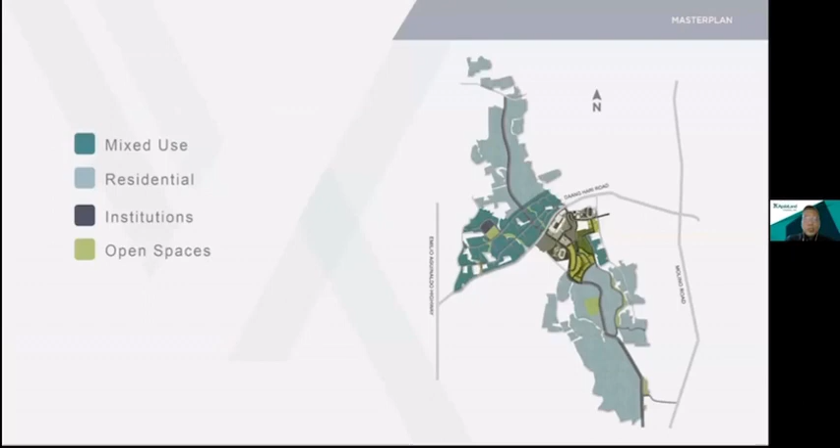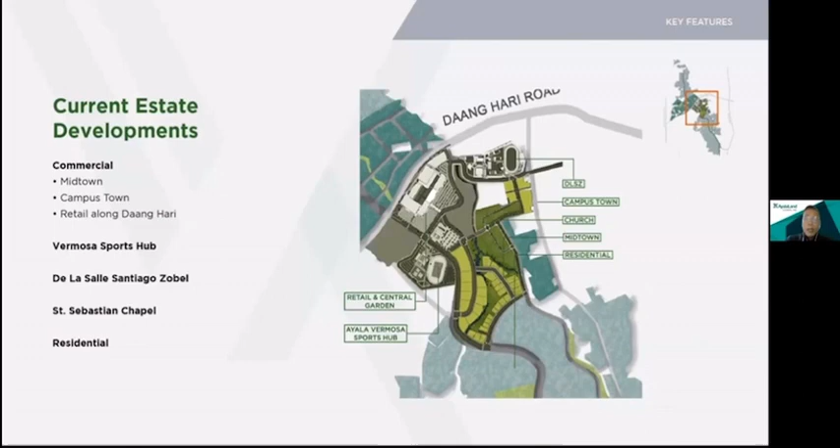Here's the master plan of Vermosa, which encourages walking and biking in the estate. The master plan ensures that each residential subdivision within the project will have access to the commercial business district or a neighborhood commercial center within a 10-minute walk or bike ride. To enable this, Vermosa has dedicated pedestrian and bike lanes.

It also features a 14-kilometer greenway that interconnects the parks and open spaces in the project, stretching from north to south of the entire estate development. This will allow free flow of traffic from residential communities to the urban core, reducing reliance on vehicles to move around.

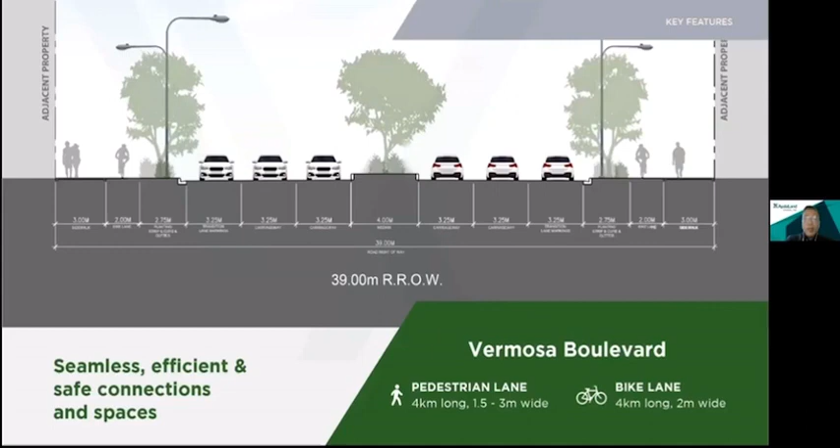Now, in order to master plan a future city, we had to look at trends to see where the market is going. There were two emerging global trends we identified that we believe will have an impact on how people live. Largely because of the media and advancement in information technology, there's a growing awareness for health issues, resulting in people becoming more conscious about their health. Second, people are spending more time and money to engage in physical activities, specifically sports.

This growth is very evident. We've seen this in the number of runners and bikers that troop to our Nuvali estate, and even our Ayala Triangle Gardens in Makati City. It is very active with runners at night.

Given these insights, Vermosa was master planned to create an environment that encourages healthy living and engaging in physical activities. By creating an environment that promotes healthy and active living, we believe that we are creating more value for our stakeholders.

Vermosa is situated along Daang Hari Road within Cavite's main centers of growth, Dasmariñas and Imus City of Cavite. The estate is easily accessible via major road networks through MCX, SLEX, and then the Susana Heights Skyway Extension.

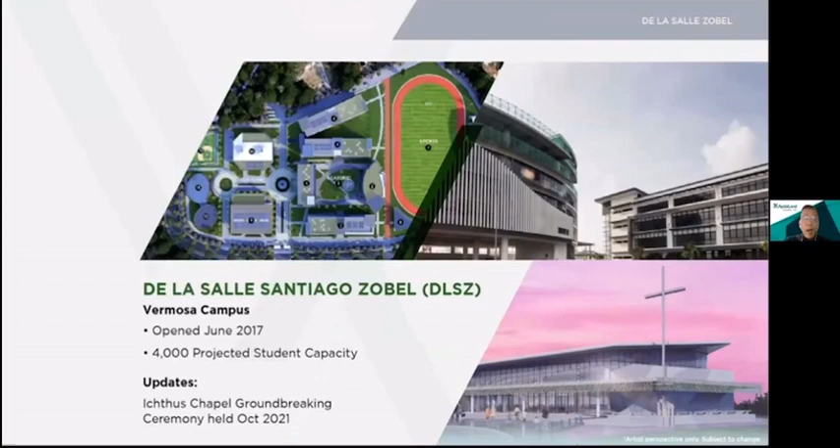Projected to have 4,000 students, this campus will cater to K-12 students. They also had their groundbreaking ceremony of their Ichthus Chapel last October 2021.

For the malls of Vermosa, or the Vermosa Mall, with a total gross leasable area of about 36,000 square meters at full build, the Ayala Malls Vermosa will be a premier destination in this side of Imus.

Jollibee opened up last December, while Peri Peri and Shakey's are targeting to open by first quarter of this year, followed by Coffee Bean and Tea Leaf by the second quarter, and the first of the 5 buildings of this mall is set to open by October of this year.

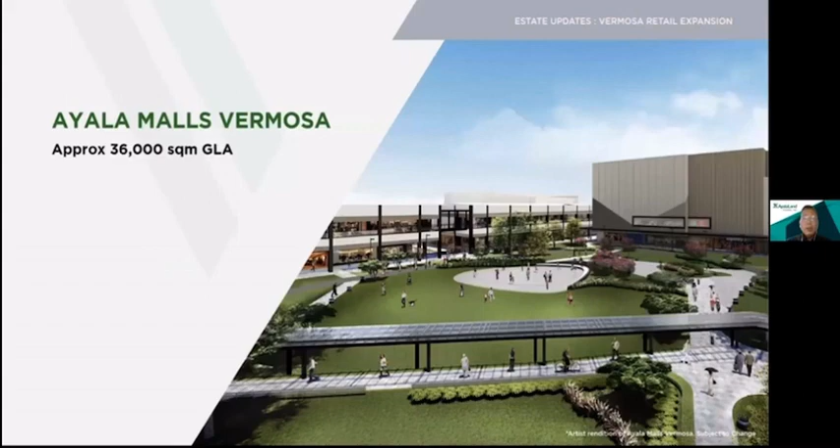Now the retail expansion caters to the growing on-the-go communities. Currently operational are Starbucks, McDonald's, and Petron, while Burger King and the Central Garden of the malls are set to commence construction by this year. Soon to rise in Vermosa as well is the fastest growing membership shopping store in the country, Landers.

With the market potential, Vermosa will launch this quarter an outdoor weekend market that will offer affordable food options, home, and sporting accessories. To provide transport connectivity to and from Vermosa, a transport terminal is set to operate by next year, 2023.

Named after the patron saint of athletes, the St. Sebastian Church will be erected in the heart of Vermosa. A 250-seating capacity structure will cater to Vermosa and its surrounding communities.

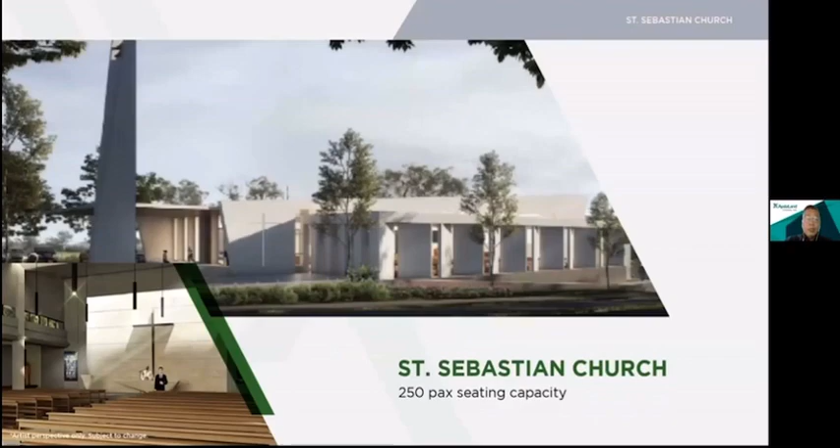Let me now introduce to you Vermosa Campus Town. This is the newest inventory for commercial properties, envisioned to be a vibrant center for youth culture in the estate. It is a sub-district of Vermosa Midtown, cultivating the interest of the younger market, a commercial and residential district that offers choices for affordable dining, retail, and shop houses for residential living.

The total area for the Campus Town project is about 11.2 hectares, with lot cuts ranging from 1,300 square meters to as high as 3,485 square meters. It's envisioned to be a contemporary urban district, resembling harmonized modern American blocks.

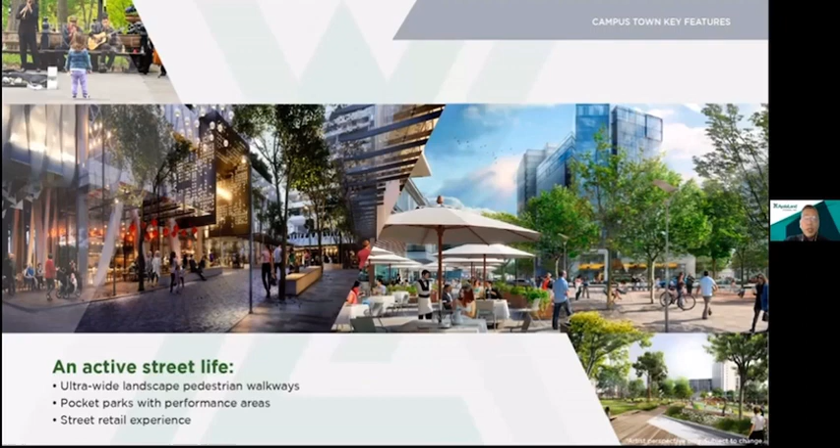It would feature an active street life, and this development will have a street life experience bolstered by ultra-wide landscape pedestrian walkways, pocket parks with performance areas, and a street retail experience.

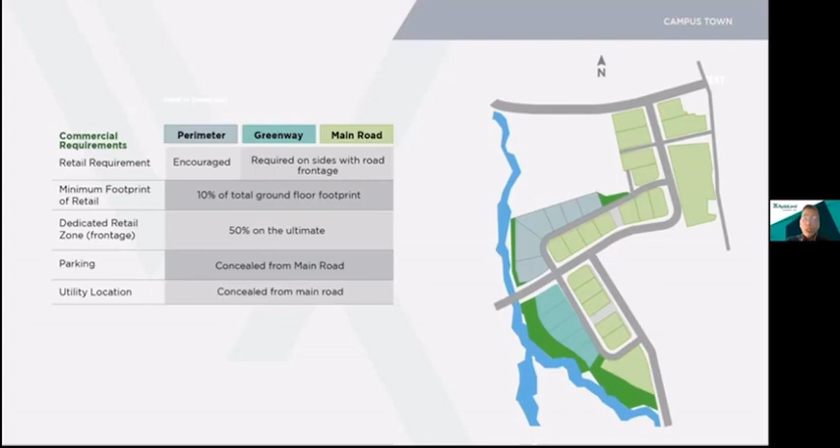In terms of general design guidelines, retail is required on greenway and main road lots with road frontage. Perimeter lots are encouraged to have retail. Minimum retail footprint must be at least 10% of the total ground floor footprint. Parking and utility locations must all be concealed from the main thoroughfare.

The following slides will show the different design intent within this development. There'll be medium-rise residential buildings and mixed-use development. Urban lifestyle is engaged by merging residential and mixed-use development with parks and dining up front to attract more people, and the MRBs, or the medium residential buildings, shall cater to student housing and public lifestyle center.

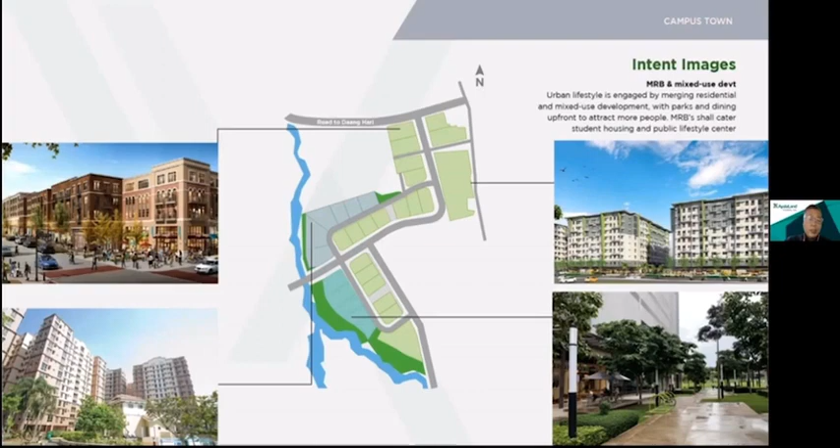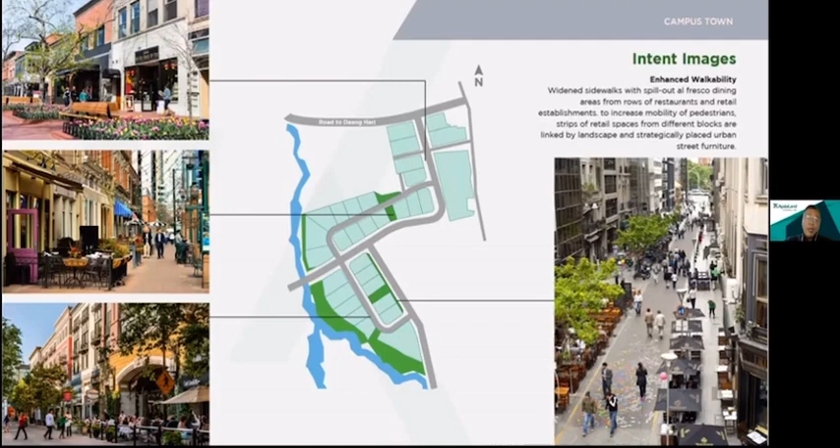It will also have an enhanced walkability, widened sidewalks with spill-out al fresco dining areas from rows of restaurants and retail establishments to increase the mobility of pedestrians. Strips of retail spaces from different blocks are linked by landscape and strategically placed urban street furniture.

Open leisure spaces are a variety of areas where students and the public can mingle and enjoy, promoting holistic interaction, not only as consumers, but as part of the community. Such landscape areas engage outdoor activities including picnicking, playing, or simply studying.

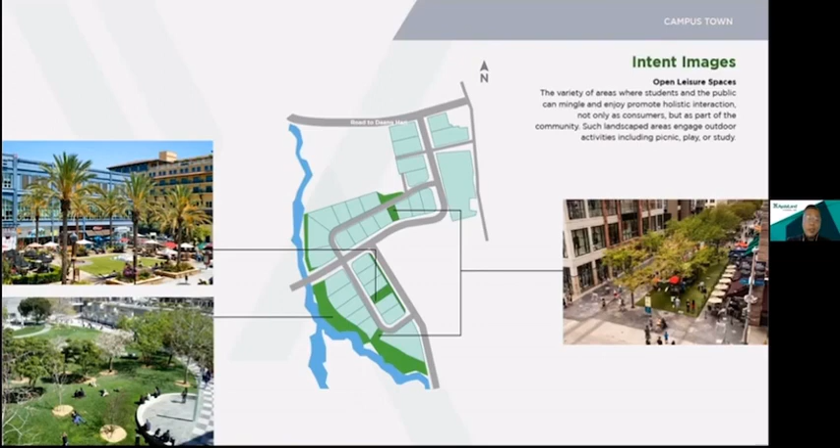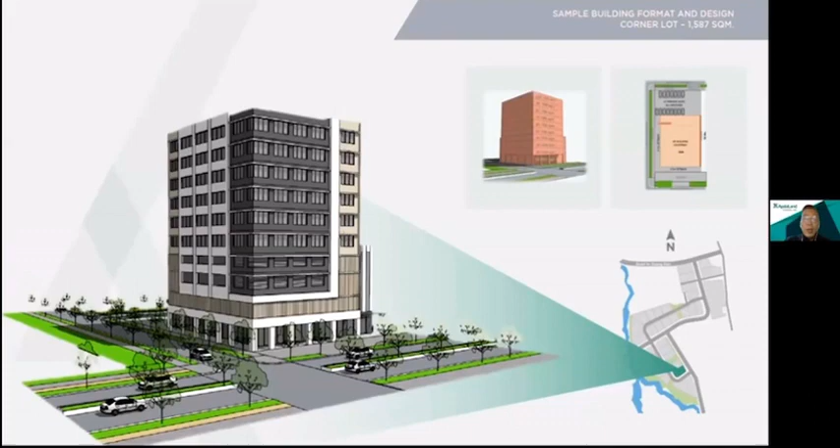And these are the slides showing how we envision the Vermosa Campus Town. For everyone's information, Amaia Medium Residential Building is set to launch by this year, while Avida Medium Residential Building will be by 2023. The entire Vermosa Campus Town is just fronting De La Salle Santiago Zobel.

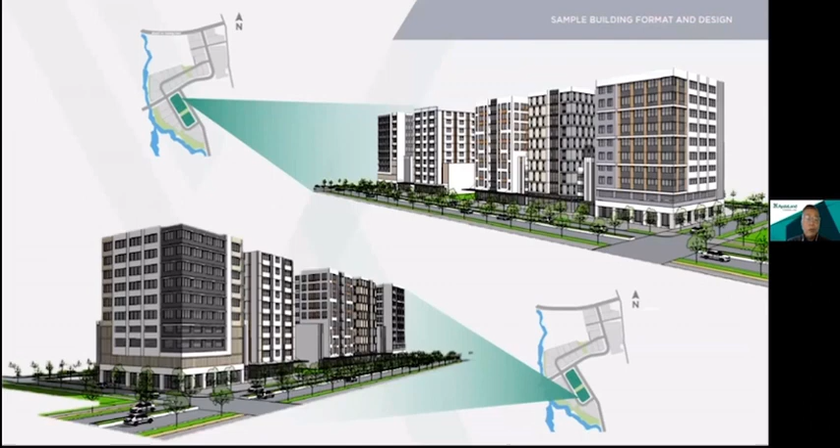A partner to this is the University of Asia and the Pacific, or UA&P, planning to open a school for sports science, hotel and restaurant management, and a center for innovation in the arts in 3 to 4 years' time. It's situated in a 5,000 square meter parcel, and they'll come up with 3 towers, each tower for each school.

Now, with Vermosa Midtown, we have 16 lots made available late last year. And just noontime today, please don't offer anymore Block 5, Lot 1. It was already considered sold.